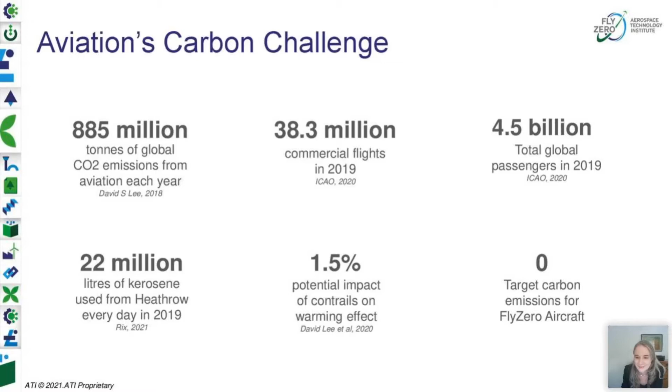So this is our mission, to realise zero carbon emission commercial flight by the end of the decade. You might have seen around you in the news lots of small electric aircraft coming to the market now, but we're interested in how you can push that technology further to cover larger aircraft.

So Team FlyZero has been formed by the UK government and the Aerospace Technology Institute this year, and it draws upon experts from across all of these organisations.

I'm actually seconded in from the High Value Manufacturing Catapult Centre, from MTC, the Manufacturing Technology Centre, which is part of that consortia. And we've been working together entirely remotely for a year in order to lay down the pathways to zero carbon emissions. And we've been working across the whole ecosystem.

You've seen EasyJet and NATS, the National Air Traffic Services, there, but we're working with companies across industry. We're working in kind of producer space within different research institutes, and we're also working with airlines and airports as well.

So what was our approach? It's a 15-month project, to understand the feasibility of achieving zero carbon flight and then to lay down the forward roadmaps.

We spent the first 3 months or so assessing different technology options. We refer to them as technology bricks. And there's a few that are really critical, we believe, to realising zero carbon flight: hydrogen gas turbines, cryogenics, thermal management, new wings, fuel cells and electrical systems.

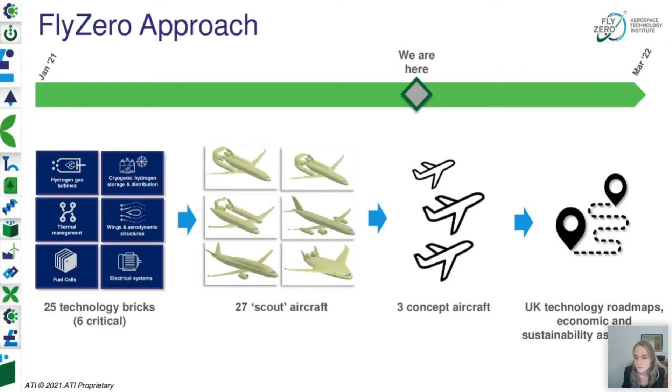Just to give some context, perhaps, which I maybe should have started with: the Aerospace Technology Institute is the UK funding body for aerospace-specific research and development. They distribute in the order of £150 million of research grant funding every year, and so these roadmaps will be used to potentially direct future R&D activity.

So I spoke about the critical technology bricks. This picture just shows that there are more. We're not just looking at fuel cells. We've considered all sorts of things, including ammonia as an option. We've looked at batteries, and we're also looking at underpinning technologies such as materials, life cycle management, digital tech for compressed design and validation, testing, simulation, and we're also looking at operations technologies. So how do you do rapid and safe turnaround? Alejandro will focus very much on what the operational challenges are.

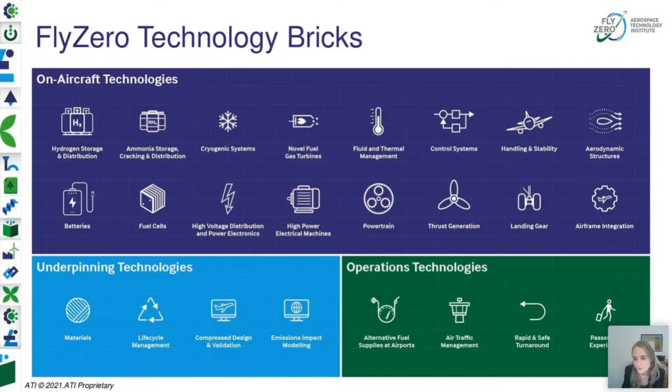So the Scout aircraft that I mentioned, we created over 20 of these, and they were developed as a way to evaluate the potential features of the aircraft concepts that represent the biggest opportunities and challenges for the integration of zero carbon emissions technologies.

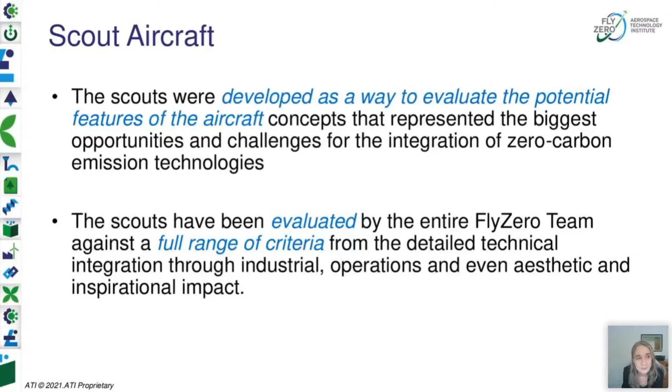The Scouts have been evaluated by the entire Fly Zero team, and we looked at them with a number of different criteria. We considered technical, but also industrial considerations - how could the supply chain achieve it, could it be manufactured - and operations. We even gave some thought to the inspirational element, because if industry, and also the wider world, is not inspired to make this happen, then it probably won't.

This image shows some of our Scout aircraft, and I will show a video of all of them at the end. You can see some of them are fairly familiar architectures, but some are much more radical. Especially if you look to the top of the screen, you can see one that looks a bit more like a catamaran aircraft, and then we've got some very novel wing structures in there as well. So we were trying to be broad in the Scout aircraft.

In the concept aircraft, which is our next phase, we'll get 3 aircraft covering regional, narrow body and mid-sized aircraft. We'll try and combine the features which we found were most critical to realising zero carbon emissions and represent them to industry, to the aviation sector and the wider public.

This shows a picture of all the different Scout aircraft. There's some content around what sizes they are, what the main fuel source is, and a lot of stuff on this on the Aerospace Technology Institute website if you want to have a look. You can see there how different they are.

Perhaps if you look at the one in the middle that looks a little bit like a beluga, that space there in the fuselage is in order to keep the hydrogen. So hydrogen - kerosene, the existing jet fuel, is kept in the wings - but liquid hydrogen will have volumes 2 or more times bigger depending upon the type of flight paths you're wanting to carry out. So the location of the hydrogen will have to move. Some might be in the wings, some might be in the fuselage, or you might have to change the shape of the fuselage so that you can have these kind of storage tanks.

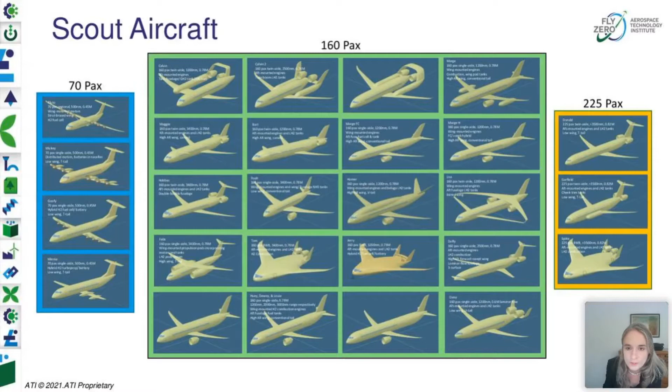In terms of project outputs for this year, our year 1, the feasibility phase of Fly Zero, we'll have about 40 published outputs, a range of technology roadmaps, but also the sustainability and economic case. These are 3 concept aircraft, and below I've just listed what some of those outputs will be - roadmap, market assessment, industrial footprint, and industrialization roadmap. I'm responsible for that bit, economic case, and the sustainability assessment.

So just to talk you through some of the drivers, or challenges, in terms of market size and CO2 for regional aircraft - this is a complete coincidence, but we have validated this - our projection is that the size of the market for regional aircraft between 2030 and 2050 will be 7%. Similarly, the emissions for regional aircraft in 2019 was 7% as well. So complete coincidence, I said. And regional aircraft emit the lowest amount of CO2 per aircraft in a given year.

If you move up to narrow body aircraft, the type of plane you'd fly to like Malaga on your holidays, then they are responsible for about 51% of the future market, 51% of CO2 emissions, and they emit a larger amount per aircraft in a given year of operation. Then finally, wide body aircraft - things all the way up to a 787, which you travel all the way to Sydney on. They're responsible - I'm going to get the adding wrong, panic - so they're responsible for 42% of the market, the CO2 emissions, and they are responsible for the largest CO2 emissions per aircraft.

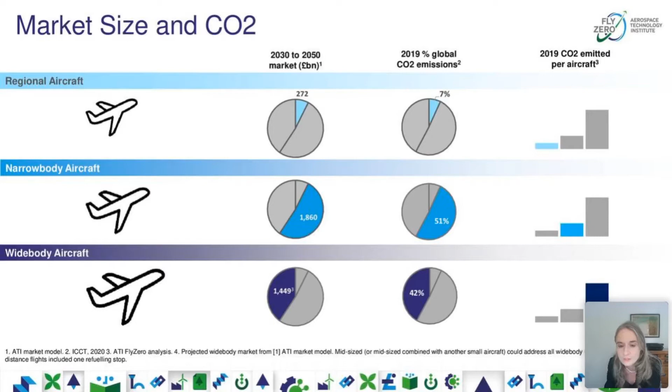It's likely, though, that due to affordability, there'll only be one fleet refresh between now and 2050, so by the time we're trying to hit our net zero targets, due to COVID recovery, perhaps 60% of these aircraft will be delivered after 2030. So there's an opportunity to potentially get 60% of all aircraft to zero carbon if we can deliver

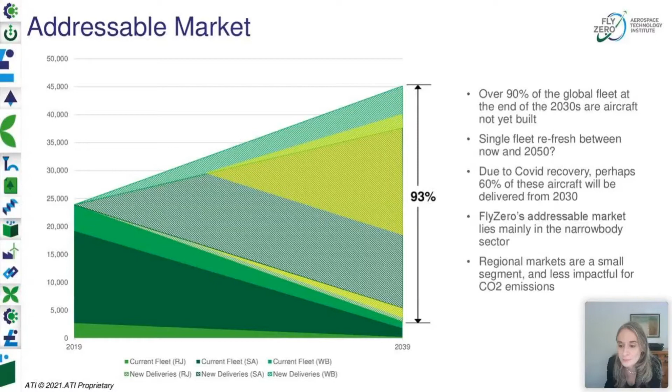a zero carbon aircraft or develop it to maturity in time. Fly Zero's addressable market lies mainly in the narrow body sector because the technology has limited application to long range, and as I said before, regional markets are really less impactful. So we really need to go as fast as we can to maximise the number of

aircraft that are replaced with zero carbon emissions aircraft. Fly Zero is therefore focusing on this mid-range, between 300 and 3,000 nautical miles. We see that smaller aircraft are being developed now by the market and are fully electric with batteries. The very long-range aircraft, like the 787, will have to be fueled by sustainable aviation fuels,

and we believe it would be appropriate to concentrate the use of sustainable aviation fuels there. Sustainable aviation fuels are kerosene drop-in fuels, replacements for kerosene, manufactured by different routes. They could be manufactured from bioproduct, or from hydrogen - you take the hydrogen and process it into a kerosene replacement.

But the capacity for sustainable aviation fuels is very low at the moment, and if that was to become a solution for the entire aviation industry, it would have to be ramped up very radically. So this is a slide which seeks to compare alternatives for primary fuel sources. On the right-hand side we've got the sustainable aviation fuels I just spoke about, and all the fuels on the left are zero carbon options.

So batteries are the best option in terms of emissions - you can see it's green for CO2 emissions, for NOx, and for contrails, if you can recharge them using renewable energy.

Liquid hydrogen fuel cells and liquid hydrogen combustion probably give you the best intermediate option. The reason you need to look at them above batteries is because batteries are limited in terms of how big an aircraft they can power and how far it can go. Without a breakthrough in battery technology, it won't be applicable to aircraft like, say, an A320 or 737 size.

However, liquid hydrogen combustors, possibly supported by a liquid hydrogen fuel cell, do have potential. You'd have seen that if you follow Airbus, because Airbus announced development of their ZEROe range of aircraft, which go into those medium range markets using this type of technology.

Gaseous hydrogen isn't really an option because it takes up too much volume. Ammonia isn't really an option because of the amount of nitrous oxides it produces, and also because of some issues around safety and smell. So therefore, liquid hydrogen is a lightweight, relatively affordable fuel, and is really the best route to a green strategic capability for aviation. By strategic, we mean addressing those bigger aircraft, bigger market, bigger CO2 emissions.

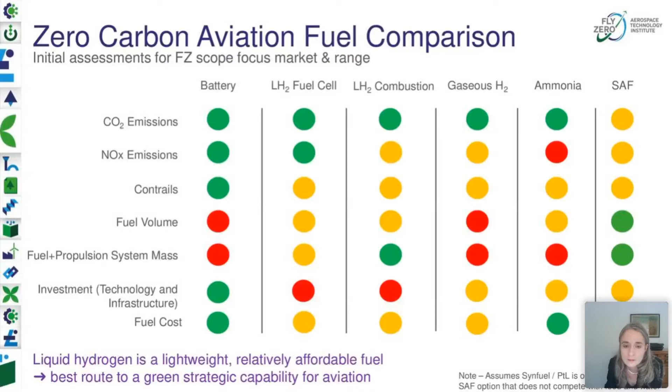So, as I was saying, battery and also fuel cell on its own are relevant to sub-regional and regional aircraft. Meanwhile, to get to zero carbon aircraft that are larger, single aisle, mid-size, you need to go to a hydrogen burning gas turbine. This slide also shows some of the systems and structures absolutely critical to realizing this.

So in order to have a liquid hydrogen powered aircraft, you're going to need cryogenic hydrogen storage and distribution - a cryogenic tank, a cryogenically cooled tank, a cryogenic fuel system, all the way up to the combustor. You'll need thermal management because you're going from temperatures down to 20 Kelvin all the way up to 1200 degrees C in the combustor, or higher.

And you're also going to need new wings and structures. In particular, if there's no liquid hydrogen in the wing - if you decide not to put any of it in the wing - then you'll have a dry wing, and that creates a completely new wing design compared to what we have now.

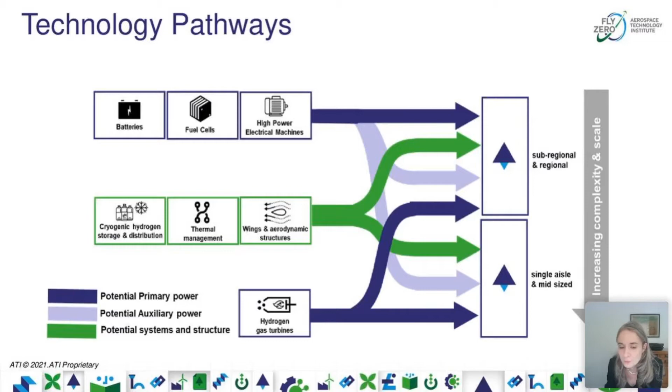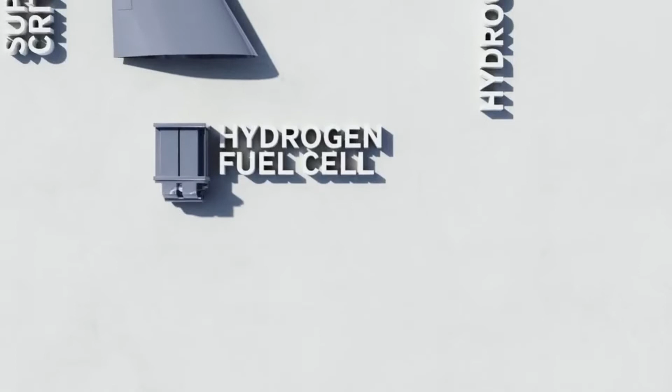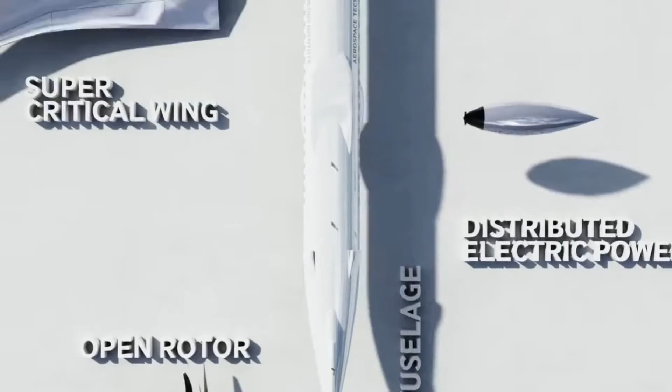Led by the Aerospace Technology Institute and backed by the UK government, Fly Zero is a one-of-a-kind research project aiming to realise zero carbon emission air travel by the end of the decade. A team of experts from across UK aerospace and academia is working to develop the new technologies that we will need to propel the next generation of aircraft into our skies. And by fusing these technologies together to create and evaluate a fleet of groundbreaking new concepts, ATI Fly Zero is defining a truly sustainable future for the aircraft, airports, and airspace of tomorrow. As the global aviation industry looks to a brighter, greener future, Fly Zero will help the UK stand at the forefront of sustainable flight in design, manufacture, technology, and skills for years to come. A new dawn for aviation is on the horizon.

Thank you, Katy, for that good presentation and for the inspiring video. I don't know what you all think, but I really like that video. I think it's very cool.

Building a little bit on what Katy presented, I will present this joint initiative between ACI, Airports Council International, and ATI, the Aerospace Technology Institute, on a few aspects of integrating hydrogen aircraft into airports. This is all a report which is published, you can download it from the ATI or the ACI website. If you Google ATI, ACI, hydrogen airports, that will probably direct you to where this is. It's free, and I will present the background of why we did this and what's inside the report, and what we learned, what are some of the challenges, etc. Any details you can find there on the report itself.

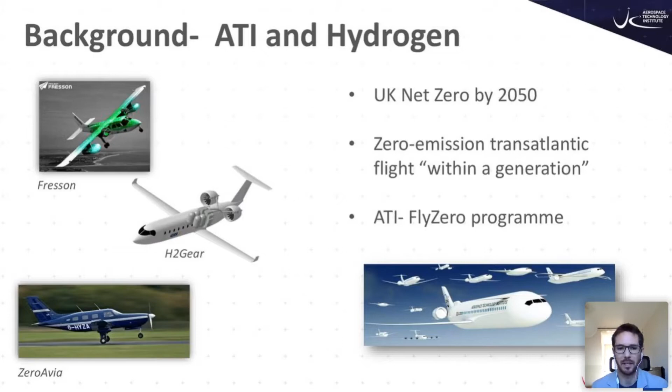Now, this is a little bit of a busy slide, I apologize. I'm trying to put three ideas here at the same time. So, of course, now we're talking about Fly Zero and Airbus and all of that, in 2021, and this all seems very novel. Hydrogen aircraft—we've never flown on a hydrogen aircraft before. It sounds very novel, very innovative.

However, one of the first things we did was look back at hydrogen in aviation over time. We ended up looking back almost to the beginning of the jet age, when one of the first jet engines, by von Ohain, was built and tested with hydrogen. They actually identified hydrogen back then as a very promising fuel for aircraft. We moved through time with experimental testing in the US, in Russia, numerical analysis, etc., going back decades. So everything we are doing now is based on decades and decades of research.

Now, on top of that timeline, I have a personal timeline. My grandmother, who's still around, was born in 1927. Sometimes I think, wow, when my grandma was born, biplanes were still flying with piston engines. As she grew older, we had DC-3s flying on piston engines as well. Then she lived through the entry into service of the 747, the Concorde, the B787, and the A350. So within my grandma's lifetime, she has seen pretty much the whole history of aviation.

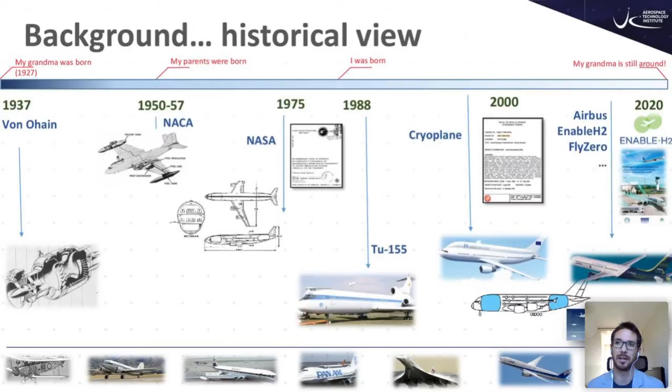So there is a little bit of hope there. Anyway, the point of this slide was just to show that when we talk about hydrogen in aviation, there is a lot of knowledge out there, and some of that touches on airport infrastructure, which is the topic of our report. So we took those learnings and wondered what are the gaps that still remain, what can we learn, and how can we address those gaps?

So one might think, okay, if hydrogen has been considered for aviation since the 1930s, why hasn't it happened? We had these waves in the 70s and then again in the 2000s, and is this another wave that will die down?

We have reasons to believe it's worth paying attention to now because of the specific context we're in. Never before have we transported passengers in hydrogen-powered transport. Now we have buses, trains. We have airports deploying hydrogen on site—there's a photograph of hydrogen forklifts operating at Kansai Airport in Japan. We have examples like that in the US and in Europe as well. So hydrogen is becoming a more integral part of our economies, not only for oil refining or the chemical industry, the two biggest applications, but to transport passengers and decarbonize airports.

On the right-hand side, we see snips of recent hydrogen strategies popping up all around the world—not only in Europe, but in the US, Canada, Oman, Argentina, Chile. About 60 countries have produced a hydrogen strategy to date.

What is the motivation for this? Before, in previous waves of hydrogen, it was oil scarcity, energy independence, rising oil prices. Now the motivation is different—it's climate. We've said we are in a climate emergency, and the IPCC 6th assessment report was dubbed a code red for humanity by the United Nations. So we are really in a climate emergency, and this is what's pushing the use of clean energies and hydrogen, and that's not going to go away.

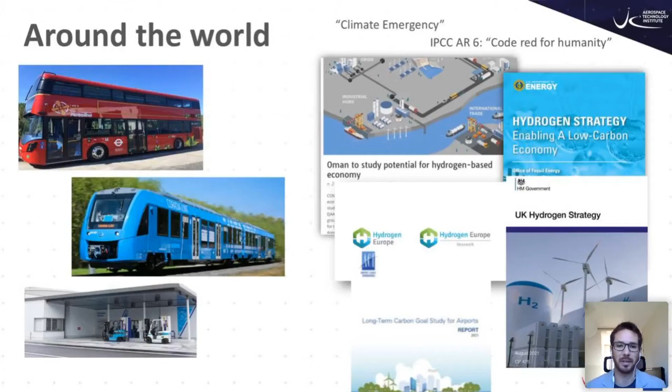Beyond that, we spoke to experts familiar with hydrogen today. Enable H2, for example, is a European project trying to revitalize enthusiasm for hydrogen, doing experiments and numerical testing—impressive things. NASA, of course, has a lot of experience with liquid hydrogen; we spoke to experts at the Kennedy Space Center. FlyZero too, and so on. We really tried to get experts' views on whether conclusions from reports done in the 70s are still valid today. Most of them are—where have we gone since then? All of this is captured in our report.

Now, what do we have inside? We have mainly five sections, and I'll dig a little deeper into each, but not dwell too long. We have a section on supply chain distribution at the airport: how do we bring hydrogen to the airport, and once inside, how do we distribute it to aircraft? Shall we bring it liquid, gaseous, or make it on site? What does it depend on? Safety, of course—I'll speak about that.

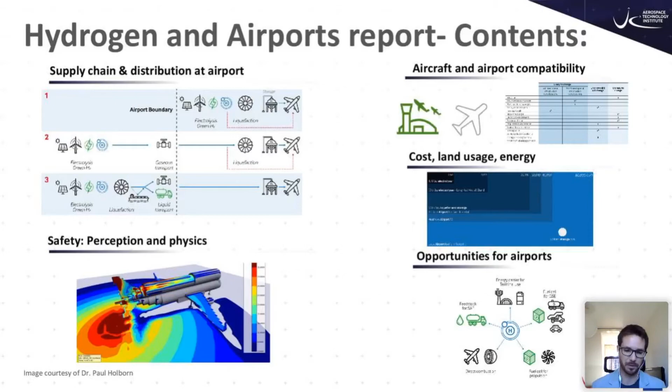We also saw some opportunities for airports. When it comes to infrastructure at the airport, it's quite feasible, in the sense that we don't need to develop anything from scratch. You don't need to invent an electrolyzer to make hydrogen from water and electricity—those elements already exist. We don't need to invent a truck that can transport hydrogen to the airport, because they already exist and transport liquid hydrogen today. There's a photograph there. We can also transport hydrogen by pipelines.

Today there are about 5,000 kilometers of hydrogen pipelines around the world. The first one was built in 1937, so you can imagine this is quite an old industry. Can we repurpose natural gas pipelines to transport hydrogen? There are many projects in Europe, in the UK, in Germany, in France, looking at doing that for home use—blending 20% hydrogen and slowly rising that up to 100%.

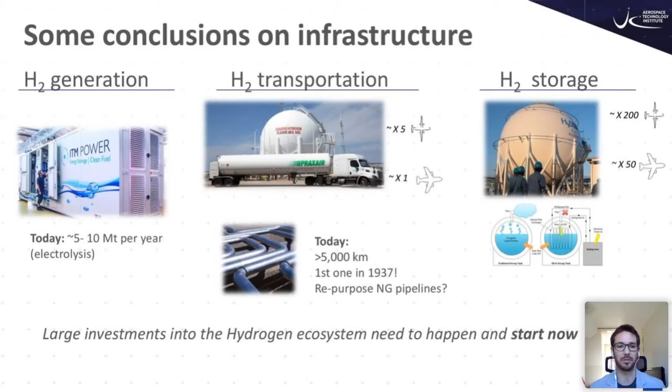The same with storage. So in terms of infrastructure, we have the elements, we have the building blocks. Now we have to adapt that to our environment, and that is a challenge. I'm not going to say it's easy, but we're not starting from scratch. However, all of this infrastructure is going to take time to build—we're talking 10-year lead times, etc. So we need to plan now, start acting now, and start assessing it now.

Another conclusion, perhaps obvious: every airport is different. But what's interesting is to see how airports operate today. We have three photographs. On the left is Mexico City Airport, one of the busiest in Latin America, in the middle of a city with 20-25 million people, completely surrounded, and it receives its fuel entirely by truck.

If you zoom in onto the fuel farm on Google Maps, you'll see the trucks lining up and waiting to offload fuel there. This is a practice that not only Mexico City, but some airports around the world use, and it is feasible. It's the most inefficient way to bring fuel to an airport, but it is feasible.

In the middle is Zurich Airport in Europe, and you can see a big black line going from the left-hand side to the bottom of the photo—that's a railway line. This airport receives its fuel entirely by rail. So again, an opportunity here to transport liquid hydrogen by rail—we don't need to build extra infrastructure for that.

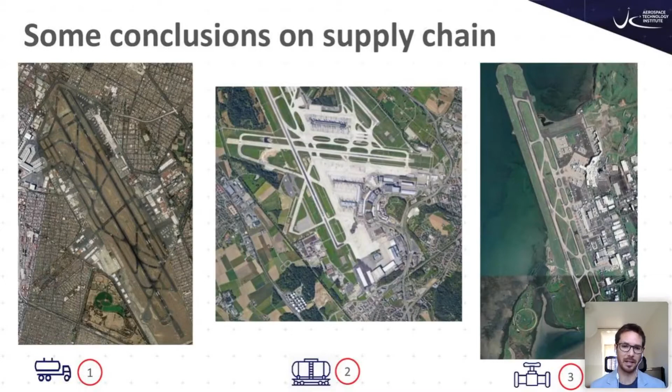Number 3 is Auckland Airport in New Zealand, a very interesting airport because New Zealand has a very clean grid, meaning the electricity there is done mainly by renewables. You can see that airport is surrounded by water and has a lot of space. Could we make hydrogen on site there? Perhaps we could. So very different situations—airports are limited by their geography, location, the wider economic context, and the energy grid.

So what are we doing now about that? We've identified some of these variables and three routes for hydrogen into airports: either make it on site, import gaseous hydrogen into the airport, or make the hydrogen offsite, liquefy it, and bring liquid hydrogen from outside, even from a different country. This is happening today already—liquid hydrogen shipments are happening around the world.

So what is the infrastructure? Now we are working with 5 airports in the UK with FlyZero, and we are doing feasibility assessments for all of these 3 options for every airport, to try to quantify how much space we would need for each one, where we could fit all of this infrastructure, how much it would cost, etc.

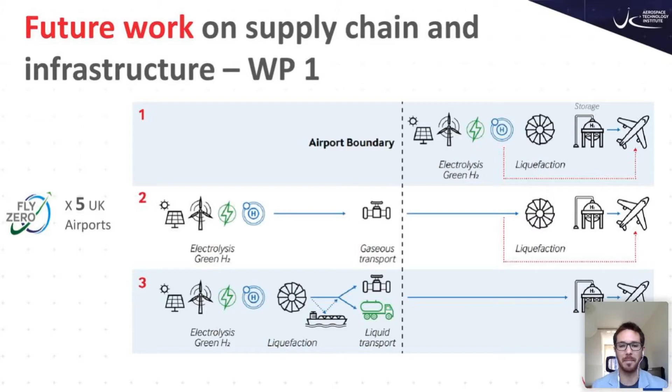So we now have mini master plans of these airports with the infrastructure elements in there. We're also putting this together in the context of the wider hydrogen economy around. So what happens if the UK has a limited hydrogen supply? What happens if the airport is in a hydrogen corridor, where there's just one region in the UK that has hydrogen and the airport seems to be close by? And what happens if we have a hydrogen grid where a region or a country is connected by hydrogen all around, and the airport can tap into that supply? So we're putting all of this into context, and that is our second work package.

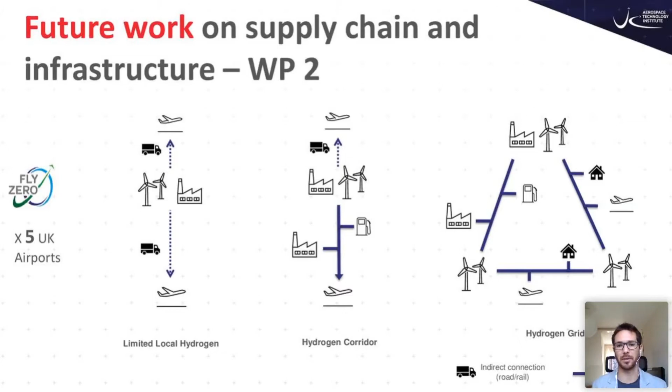Moving on to safety. This is a very interesting topic, and of course some people still think about the disaster in 1937 when we talk about hydrogen. Of course, aircraft today are no longer made of flammable fabric, and it's completely different.

The application of hydrogen today, you can see we transport passengers with hydrogen in a safe manner. So we address two aspects. One is the passenger perception - what do we need to do to make passengers feel comfortable? This is going to require an intensive campaign. We need to engage with passengers; they need to travel on hydrogen buses, hydrogen trains, so they get familiar with this, so they're comfortable before they jump on a hydrogen aircraft. So it's very important. But the other aspect is the physics.

So we compare specific parameters of jet fuel versus hydrogen in the report - boiling point, flammability limits, burning velocity, etc. - to see in which situations one fuel would be safer or more dangerous than the other. And the conclusion is that it depends. It's not a safer or more dangerous fuel - it's certainly different, it poses different hazards. Under some situations it can be safer, under some situations it can be more dangerous.

So what we need to do is take the existing codes and regulations around hydrogen, which already exist, and adapt them to our environment so that we make this safe. Of course, this is priority number one. We will not have a hydrogen aircraft if it's not safe, and we believe that we can make it safe.

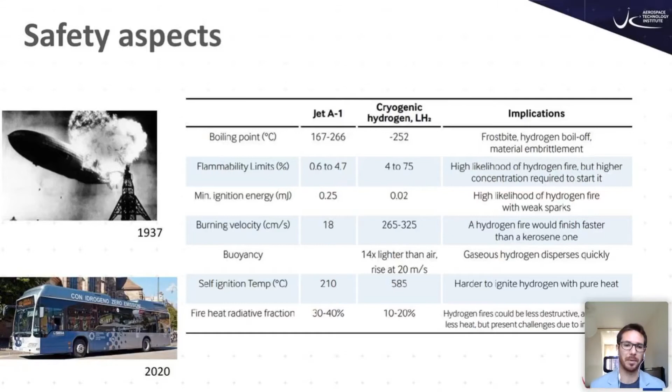So we also have a work package on this, looking into turnaround operations. What do we need to do to turn the aircraft around in the same time as a kerosene aircraft? What are the clearance distances between the refueling point and an active vehicle, for example? Can we refuel a hydrogen and a kerosene aircraft side by side? Can we automate part of the process to make it more efficient, faster, and safer? What are the existing regulations, as I mentioned, and how can we apply and adapt them to the airport environment? So we have a work package on that.

So all three of these work packages somewhat build on what we've done, and they are, of course, in support of FlyZero. Very interesting outcomes will come out from there.

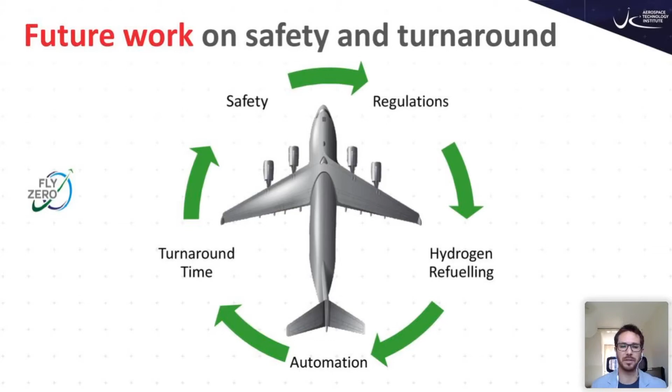Now, if an airport has a sustained hydrogen supply, could we use that to decarbonize the airport? Most certainly, yes, we could. And if the airport is producing hydrogen on site, could it enable decarbonization outside of its boundaries? Could the airport provide hydrogen for road vehicles or for homes? Could the airport become a provider of clean energy? That is a very distinctive view of the airport compared to today, where airports are usually associated with local air quality issues and noise issues. So could we change that?

Now today, airports receive many hydrocarbon products - they receive natural gas, kerosene, diesel for vehicles, sometimes gasoline as well. All of these products could be replaced with one single product, which could be hydrogen. So we looked into these opportunities, and we spoke to some of the airports that are already deploying hydrogen for their own use. So there is an opportunity there.

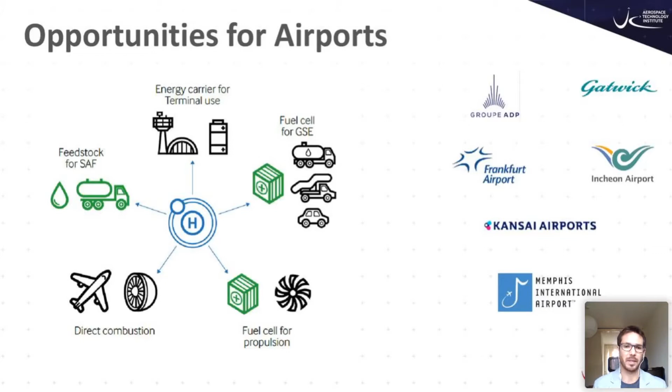Now, of course, with every opportunity there are challenges, and I don't mean to simplify this and say this is easy, we can do it overnight. It is feasible, but it will require a lot of effort. First of all, a lot of energy is going to be required to produce the hydrogen. Even if we bring the hydrogen in its gaseous form to the airport and need to liquefy it, the energy required just to liquefy the hydrogen might be just as much as the current energy consumption of the whole airport.

So we're talking about doubling the energy consumption of that airport. Now, this is going to require infrastructure. We need to make that energy to start with, so we need to deploy the renewables to be able to make that energy, to be able to enable this.

We still need to assess space at airports, especially for the most intensive infrastructure cases. If you're going to liquefy or electrolyze, is there space at the airport for this? Many airports are very space constrained.

Hydrogen needs to be widespread, so we need to have hydrogen at the point of departure and at the point of arrival. There's an opportunity for hydrogen to be tankered, but still, if we're talking about flying further away, then we need hydrogen at both ends. So are we going to have that?

So there are still a lot of challenges to overcome, but people like Katy and her team are really working towards trying to tackle some of these challenges. And my last point there is some of those challenges we might not even be aware of. We are still solving challenges on kerosene aircraft today. So I know that as we dig more into the details, more challenges will come that we will have to solve. But of course, human ingenuity has shown us that we're very good at solving challenges, especially when we are in crisis mode, and we are in terms of climate change.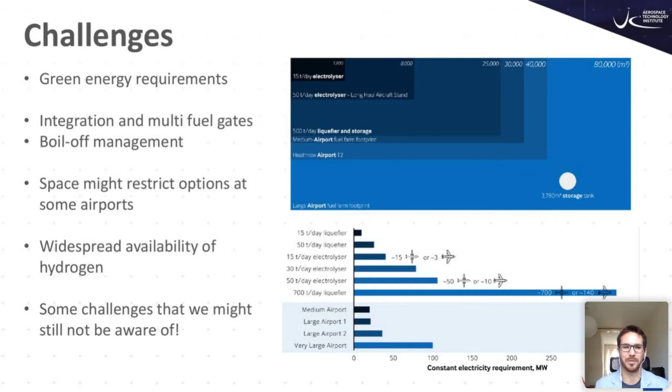So some of our conclusions. We see that hydrogen has the potential to reduce the environmental impact of aircraft. Of course, the longer the range of those aircraft, the higher the potential is. So we might see breakthroughs there.

The wider economic context is key. Aviation cannot do this on their own. Aviation cannot deploy all of the renewables, make all of this hydrogen only to power aircraft. This would be too expensive. It has to happen within a wider hydrogen economy, which we are seeing today. So that is good news.

But the consumption of hydrogen for aircraft has to be considered in all of these hydrogen strategies. We need to consider that this might be a reality and how much hydrogen we would need. So some quick assessments that we've done show that under a scenario where hydrogen gets deployed around the world in an aggressive manner, and it gets adopted in aviation too in an aggressive manner, aviation could use about 10% of the background hydrogen in 2050. So it's not a big number, but at the same time, it's a lot of millions of tons of hydrogen that have to be considered and produced in a green way.

So we need to create partnerships. It's no good for Airbus to produce this aircraft if the airlines are not willing to buy it and operate it, if the airports are not willing or not ready to host them. So airline, manufacturer, airport partnerships are key.

And of course, Katy said this already, to be able to produce SAFs, we need hydrogen too. So let's make that hydrogen green too. And hydrogen will need to be deployed, whether we use it on its own or whether we use it to refine a HEFA SAF or a PTL SAF, we will need hydrogen.

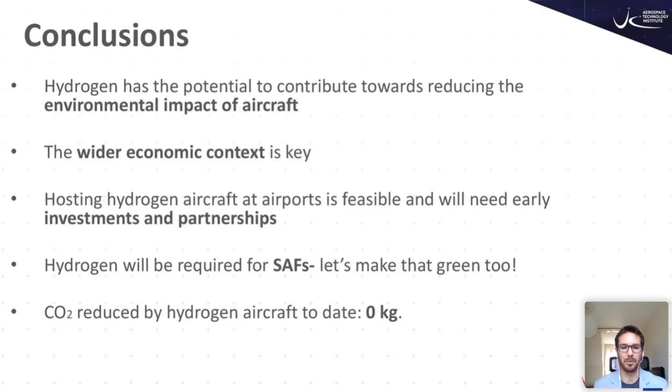And now, of course, up to date, we haven't reduced a single gram with hydrogen. It's very important to talk about it. It's very important to talk about ways to reduce our environmental impact, but we need to act and we need to reduce our emissions. So it's important to see some action.